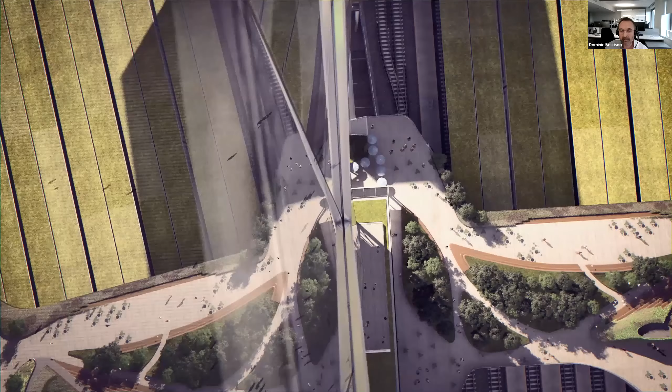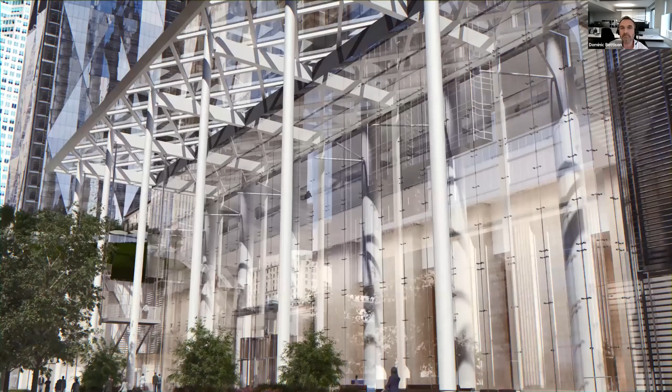An elevated park designed for collaboration and relaxation connects the towers to each other and to the city beyond. While first-rate amenities and soaring public spaces welcome tenants and visitors to Canada's newest landmark. The office floors above are uniquely planned to optimize layouts and infrastructure, increasing comfort and efficiency throughout. Conceived and developed by global real estate leaders Ivanhoe Cambridge and Hines, with a striking design by British architects WilkinsonEyre, Bay Park Center presents a singular opportunity for the world's most successful companies. And due to its privileged position on the Toronto skyline, you'll never lose your views or your visibility. 81 and 141 Bay Street at Bay Park Center, where tomorrow begins.

Okay, so I thought I would just show you that video. Sorry, it's a bit of a marketing video that was put together by the client, but it does give you an overall impression of the size of the development and some of its key components. Here you can see the buildings on the skyline of Toronto, very much sitting in the central business district. As you can see here, the landmark, obviously CN Tower in the background and the lake in the foreground.

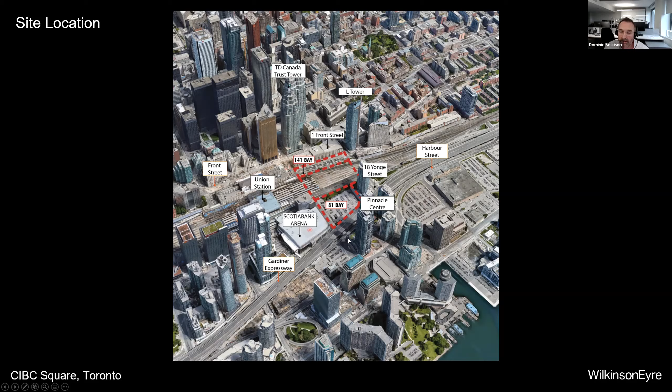The other thing to note, I suppose, is that what's happened in recent times is that development has jumped the tracks, but not office development per se, mainly residential. So residential has jumped to the southern side of the tracks and is now forming an edge to the lake itself. So going through some of the components of the project, divided into phases because of the scale of the project. The first project, 81 Bay, the South Tower.

On level 4, which is the level where the Sky Park comes into the tower, we have about 60,000 square feet of amenities. We have a huge food hall, a series of specialist restaurants, and there's a gym, and really very much a flavor of modern office development around the world, a building rich in amenities for the tenants and in some cases for the benefit of the wider population.

Also in the podium, I mentioned we were relocating the bus terminal, which is currently on the 141 Bay site. That's coming over and being housed in the podium in a 2-story structure. And then the Sky Park itself, as I mentioned, spanning across the rail corridor. This is the rail corridor here into Union Station.

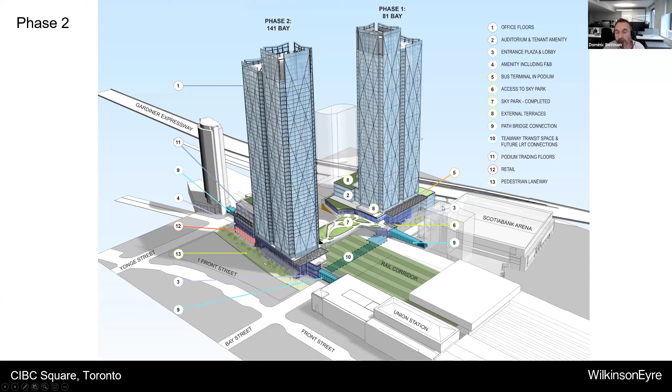In terms of the master plan, it is a massive development. It's kind of city changing, or certainly neighborhood changing in the scale of it. And the project seeks to jump the rail corridor that I mentioned before, which historically has been a bit of a scar, dislocating the central business district from the lake. So our project attempts to bridge that rail corridor with the Sky Bridge, the Sky Park, but also the upgrade to the teamway below the track. So it's an above and below ground sort of attack strategy.

But the size of the project means the urban realm was incredibly important. So key to our master plan was the development of a series of plaza spaces, 3 in fact, that key the 2 towers into Bay Street, either side of the rail corridor, and of Yonge Street, as you can see here, Yonge Street being Toronto's premier retail street.

Those 3 plazas are connected via laneways, the connections I just mentioned, and the Sky Park, to create a kind of triangulation of the project and to lock it into the city fabric, and also to push the towers back from the street frontages and to create breathing space.

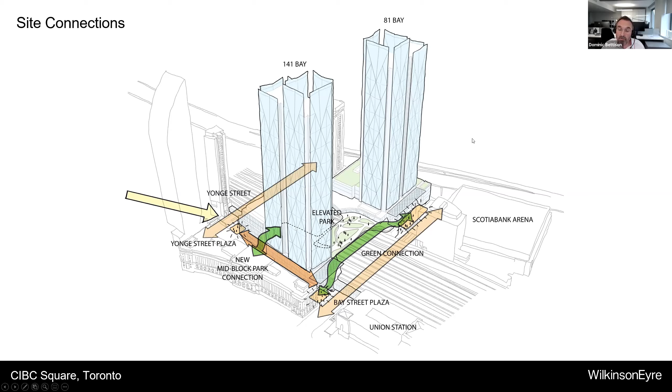So a visual of the scheme as we conceived it during the design stages, the 2 towers that I've talked about with their very distinctive folded facades, facades that are very unusual in the Toronto context, and I'll talk more about those. And the Sky Park itself, you can see here, connecting the towers and their amenity levels that have been gathered at level 4.

I've mentioned the 60,000 square foot food court in the South Tower. There's a similar food and beverage offering at that level in the North Tower. And I'll go on to talk briefly about what else is happening in the park to activate the park as well. And really that park is acting in a way to create a campus feel for the 2 towers, the way that they address each other, but it's also providing useful acoustic screening to the rail corridor and visual screening.

So it's not only a sort of benevolent issue, it's a $50 million deck that is working quite hard on a number of levels, but actually is a park on another level. You can see that what that park does though, by being effectively 25 meters above ground, is it creates lobbies that are very tall. So we have designed a series of sky lobbies that relate to the park in terms of its datum, and then we have a lower level to the lobby. So our lobbies are 25 meters high, so very impressive again in the Toronto condition.

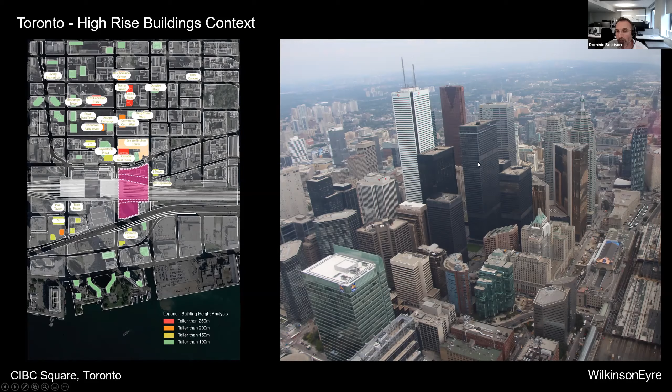So our approach really was then to try and create an architecture that really took the dialogue to the next level, and created an architecture that was different to what we saw before, and as I say, was a development, a progression of that architecture as we saw it, and an architecture that strove to create a vertical scale and massing to the appearance of the towers rather than these sort of series of uniform blocks.

So this is the standard building block of those towers, the rectangular floor plate, very much with the horizontals expressed floor by floor. What we did is we introduced a series of vertical cuts on the corners and the center of the floor plate to effectively hive off and create the appearance of 2 volumes. This is not only for architectural reasons to slim down the volume. These are 70 meters typically by 35, but it also creates corner offices, something that the Toronto market and Hines in particular feel brings real value to their floor plates.

Having introduced those articulated corners, we then slip the 2 volumes, again to reinforce the reading of two volumes. And then we added this expressive skin to give a vertical scale to the facades of the towers, and a repeating modulation on a 10-story module, and a 3-dimensionality to it, something that hasn't been seen before in Toronto, to create a real vibrancy about the facades that catch the light in a very unusual and dynamic way.

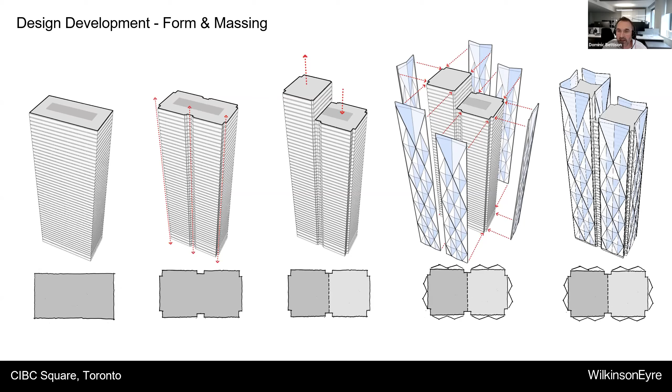But just a walk through the building. This is the South Tower. The base of the building, these 24 meter high lobbies that I mentioned with the sky lobby part of the way up. Behind that, the podium working very hard with 2 levels of bus terminal, a plant level to separate that usage, and then the amenity floor lining through with the Sky Park and the amenities I've already talked about.

And above that, the podium of office use, now being used for auditorium spaces for CIBC, and then a 3-story basement car parking. So unlike the UK, still lots of basement parking being constructed in the towers in Toronto, and then the main office element sitting above.

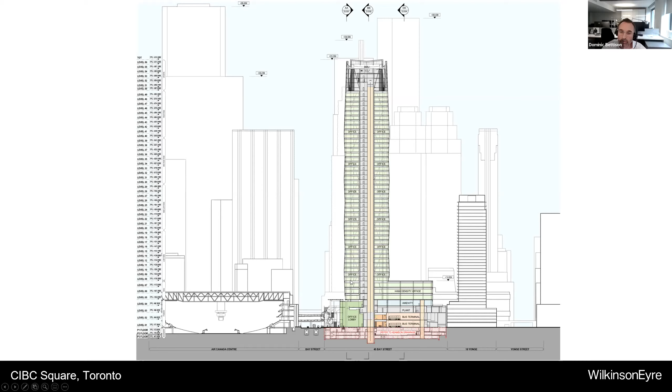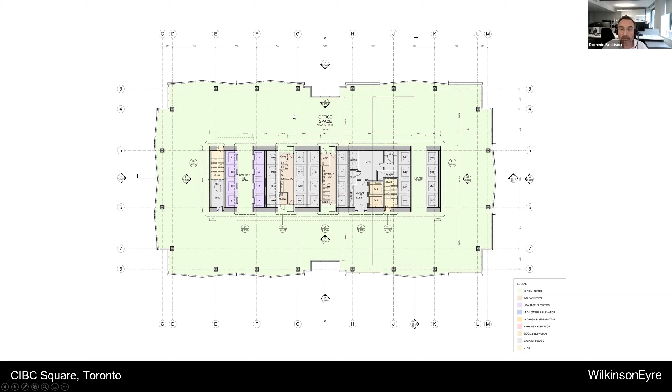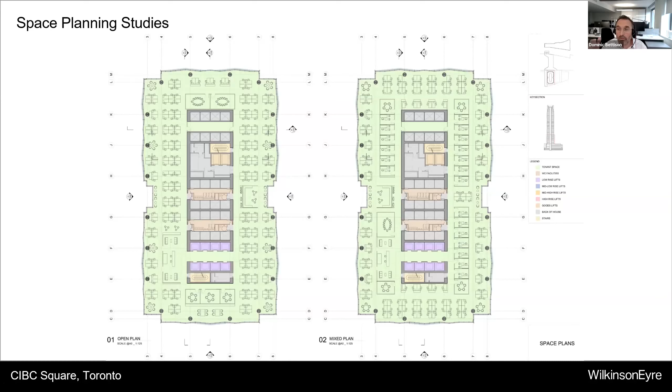And as part of the design process, lots of space planning to make sure everything worked, and indeed the amount of folding that the facades effectively now do and have been constructed, very much an output of space studies, space planning to define a kind of suitable amount of fold, not to restrict space planning flexibility.

And the office floor, generous in terms of floor to floor, 4.1 meters floor to floor to achieve 2.9 clear, and unusual to Toronto in those days. We ended up using a steel structure with a concrete core. We did do an alternative solution that looked at a concrete frame, which is much more the market at the time in Toronto. It has changed actually over those years, but a sandwich build up for the floor zone, which is generous. Services sit underneath structure, not coordinated into any structural depth. So everything, they talk about clear fly zones.

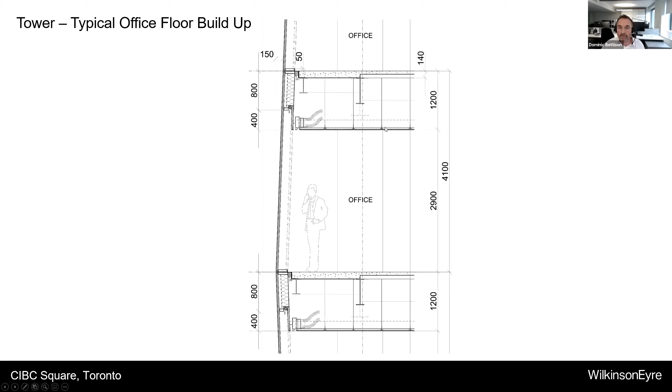And we managed to get the facade to be one piece of glass, 4.1 meters floor to floor. Again, something that was quite unusual at the time. They wanted to break the glass modules, for economic reasons. I'll talk about that shortly. But not so dissimilar to what you'd see in the UK, I guess.

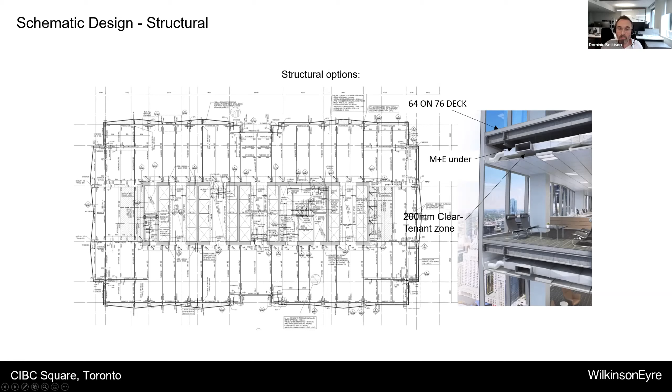An extract from RJC, the structural engineer's drawings, concrete core in the center, and a very sort of rational series of steel beams coming from that core. And you can see in this image how that floor sandwich is put together.

And as I say, the services are sitting below the structure, and a ceiling below that. Interestingly, a lot of the fit out now, even though this is a banking building, the ceilings have been removed and the services are left exposed. It'll be interesting to see how that turns out, seeing the local market isn't necessarily to set them out in a beautiful fashion because they're not normally exposed.

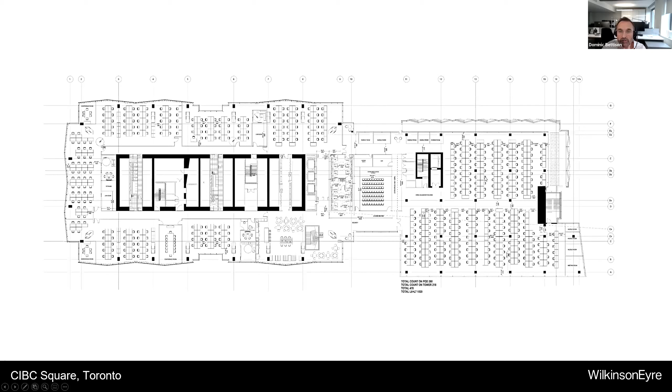So there you go. We spent a lot of time as well looking at how the folded facade would interact with partitioning systems and to get everybody comfortable that there was no flexibility impaired with what we were doing. And I just showed this to show that this is one of the trading floors in the North Tower. So a really big floor, about 60,000 square feet, I believe, in gross terms. Seat count of nearly 500 on this floor. And there's several floors of this in the North Tower.

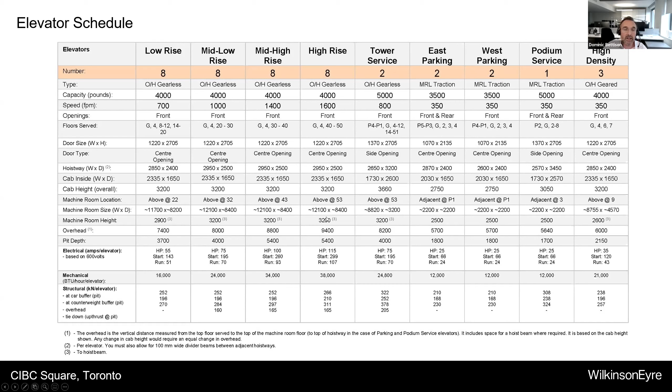Vertical transportation. They call them elevators, so I'm now increasingly calling them elevators, not lifts. I've already mentioned 4 banks of 8. Certainly in North America, there's no sky lobbies, and not that you necessarily need one in a building of this height, but everything's direct ascent from the lobby. So the core is quite large. The cars themselves are quite big as well.

And our strategy was to step the lifts back away from the west to benefit from the views as you got higher up the building. Washroom design, well, sorry, it's a bit dry, but the washrooms very much in the North American model sit within the core. They sit within the unused lift lobbies, and that's a standard throughout the world, I guess. The washroom provision isn't as onerous as in the UK. They have got some more onerous elements that have come in, but the count is much lower than in the UK. So this here is the disabled changing space.

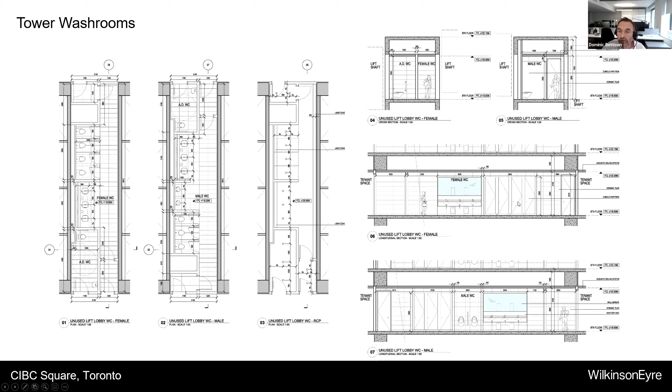It's a vast space. We have one of those on every other floor throughout the core that we need to deal with. But one of the other things that the washrooms in North America have done to this point is introduce stalls, as they call them, stalls that have very big doors that are cut very high up from the ground, 24 inches typically, 24 inches down from the top. So you can see cowboy boots and guns in holsters lined up in the stalls as you walk past. But one of the things we want to do is to bring more of a London feel, more of a sort of international banking feel to these spaces.

And we had some interesting conversations about creating country club washrooms, as they were being called, i.e. having doors that came down to the ground. In the end, we sort of met halfway, and we ended up with doors slightly raised from the ground and down from the top. But I think you can see here quite a clean washroom space, and it's one of the early renders, and still successful nevertheless.

Facade design, well, one of the major components of the project, giving its identity and its status on the Toronto skyline. This repeating diamond pattern every 10 stories, folding about 750 mil from a datum outwards to a point, and constructed by effectively adding a steel build out to a standard rectangular floor. The tower itself expressed as a tower on a podium.

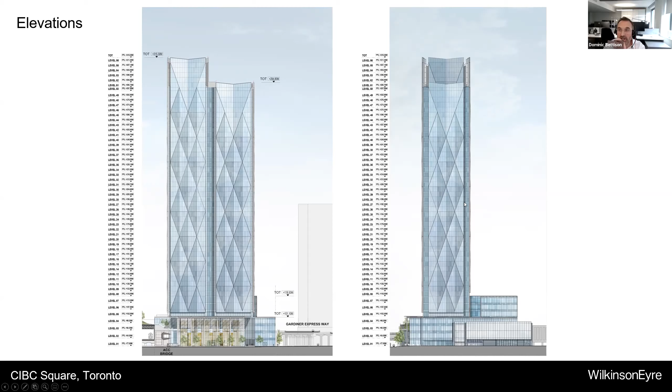This is the south elevation on the right here with the bus terminal with the big white sort of shoji screen. And then we generally like to try and have a crown to our towers. So expressing the crown of the building differently and in a kind of dramatic way, plant rooms sitting behind those big screens. And then the expression of the diamonds with external fins to really reinforce the three-dimensional geometry.

I mentioned the fact that the crown of the building oversails, goes up, and it usefully hides the plant spaces, which are pretty enormous. In this tower, 55 stories, in both towers, in fact, the plant rooms sit both at the top of the building and then right down at the base. There's no intermediate plant floors in this part of the world, and they sort of thought I was mental to be suggesting that we would have intermediate plant floors.

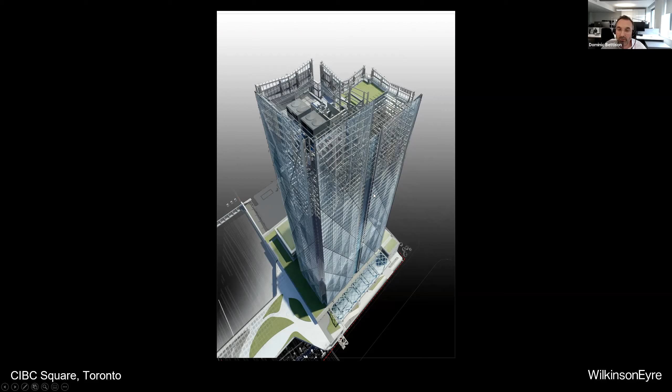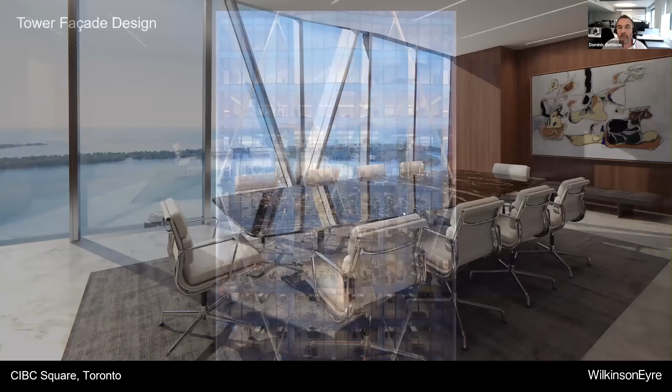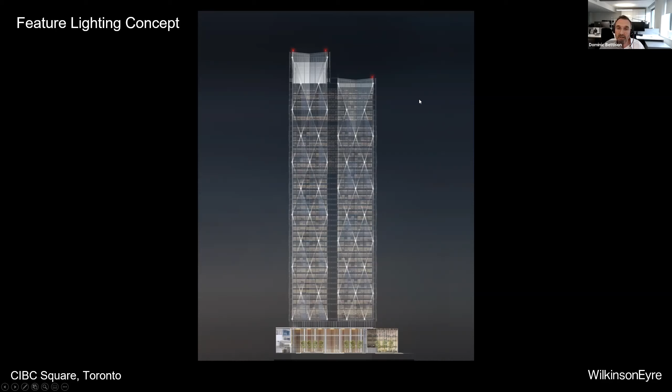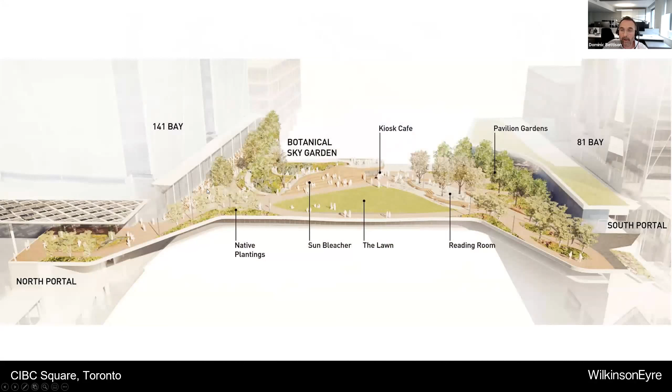Urban realm, a really important aspect of the project. We've talked about the Sky Park connecting the towers together to create this campus feeling. The amenities feeding in from either side into that Sky Park. The Sky Park is designed to provide functionality throughout the year, throughout the summer, and also into the winter, given the length of Toronto's winter. And therefore a park that has both hard and soft landscaping. The amenities, as I mentioned, address the park fully. So lots of F&B, hopefully to enliven the park, and I'm sure they will.

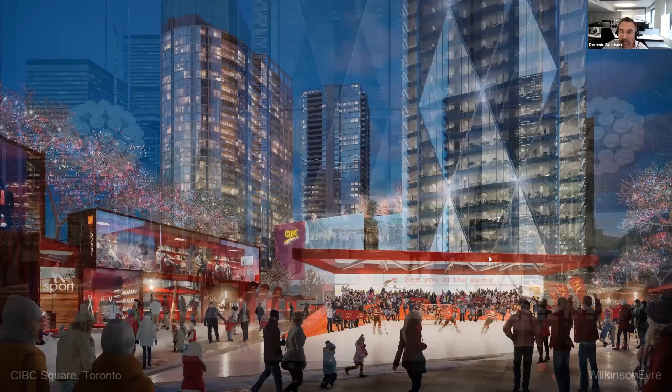There's an ice rink that's been designed up there, so the park will cater for an ice rink and all the things that come with an ice rink. You won't believe the amount of things that come with an ice rink, not just a hose and some water and wait for it to freeze. And you can see here just an urban realm diagram.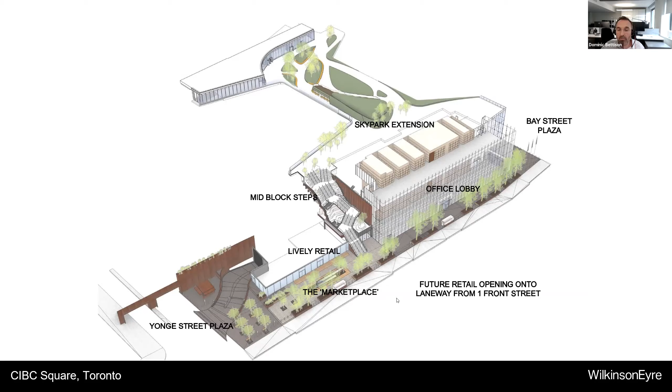So this is the 141 site. This site currently is the bus terminal. Well, it was up to Christmas, and the creation of a new laneway, which is a Toronto street, a small street, typically lined with interesting shops, boutique shops, and F&B outlets, and we've created a sort of modern version of that along the side of our project. And that's just a render of it with the lobby of the North Tower to the right there through a very transparent wall.

And moving to the North Tower, just quickly, this is a really complicated tower. This tower effectively has its core wedged up to the rail corridor, and we can't take any structure down into the rail corridor to the right of this image. So the building structure effectively comes down and is transferred back to the core with these raking columns, as you can see here, to avoid dropping columns as they would need to otherwise into the rail corridor, which is live. So you end up with a tower that's 250 meters tall, sitting on a series of inclined columns that then go back to a very thin core.

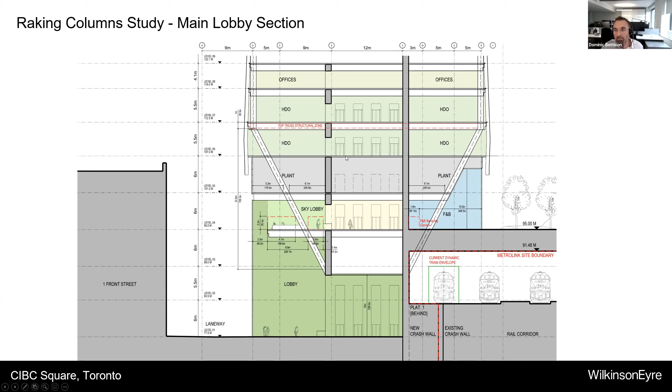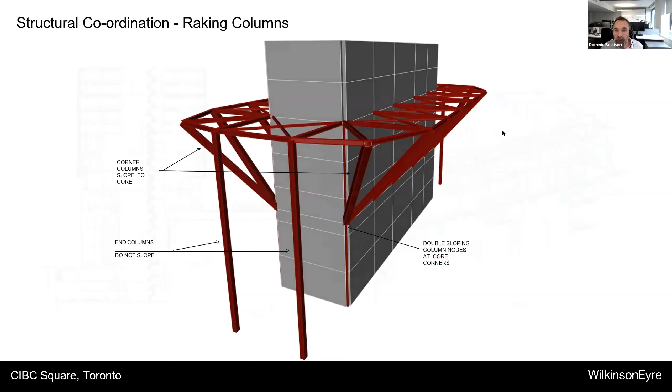We do have outriggers and a stability structure at the top, but what that does for us as architects is it creates a lobby with no columns, which is pretty unique. It was hard work for RJC, although we set a difficult challenge and they rose to it well. How you then get the structure for such a big tower to come back to the core only and to be stable and safe was quite a feat of engineering.

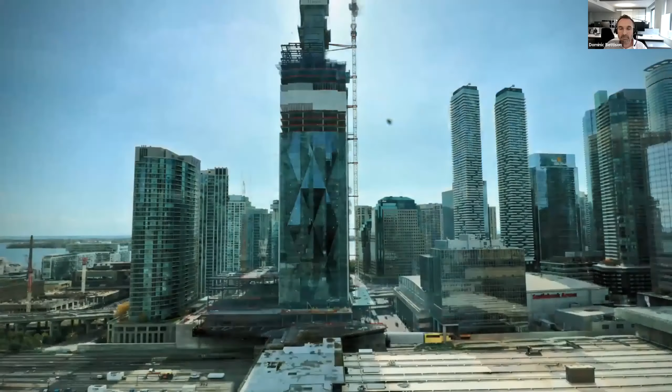Okay, thank you. That finishes my quick walk through CIBC Toronto. I'm very happy to answer any questions. Amazing, Dominic. Incredibly complex project. I look at this and I look at the constraints that you faced, and coming from Toronto, coming to London, here we face a lot of constraints with sewers and tunnels, but that is equally as difficult.

Yes, I mean, it was a really massive challenge, and so many sites in North America actually are just single sites, and you just build a building and move on to the next one. But this is so interconnected. It's quite a different mega project, really.

Absolutely, and this is actually a good follow into the first question we got from Andy Levy. From a people perspective, how many individual WilkinsonEyre architects are currently working on the project, and how many throughout the project so far? And obviously a mega project so big, I can't imagine how many architects are working on this. I didn't hear the first bit. Did you say how many staff?